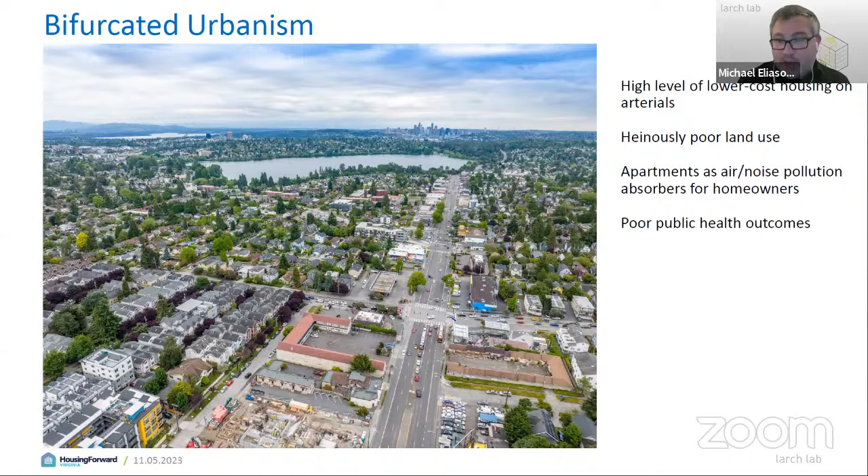Apologies, I muted myself. So today we're going to talk about unlocking family-friendly housing, livable housing, more climate-adaptive housing with point access blocks. In Seattle and the West Coast and much of the US, we have this really strange bifurcated urbanism where we focus a lot of density downtown, put density on arterials, and then immediately fall away to detached houses and townhouses. It's just kind of rare in the rest of the world. It's not a very effective way of dealing with housing costs and affordability. In the back of my mind, at Larch Lab, we're dealing with climate adaptation, decarbonized buildings, looking at how we do land use and how we design housing.

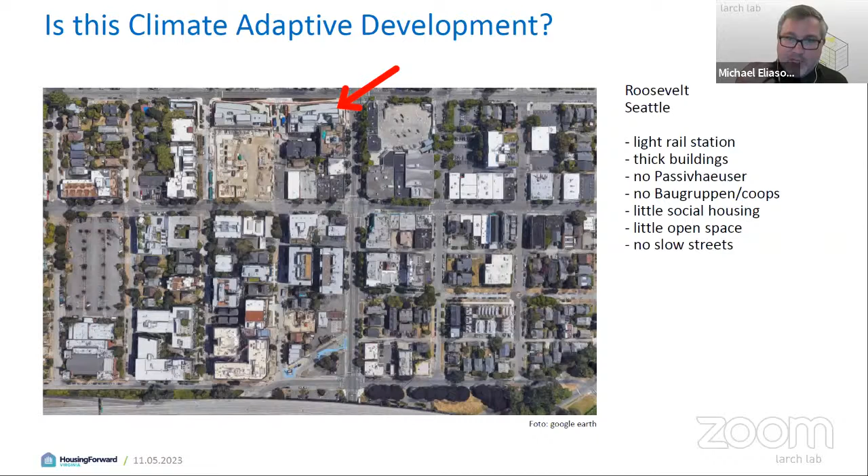This is a new light rail station in Seattle. It's surrounded by a couple of multifamily buildings, but then immediately drops away to detached houses. There are no cooperatives, there's very little social housing, there's not a lot of open space. So in thinking about how I worked on projects in eco-districts as an architect in Germany, and how we're doing things here, how we're planning here, it was kind of wildly different.

And I started to think about some of these development patterns that you find not just in traditional European architecture, but also in South America, in Asia, and in modern districts in Europe as well. There's more open space, this fine-grained development that goes on for blocks and blocks, more space for blue-green infrastructure. A lot of our historic districts have these really narrow lots with one-story, two-story commercial buildings that have existed for like 100 years.

But when they get redeveloped, developers will come in and pull together several parcels, do assemblage, and then build these huge, ginormous 5-over-1 buildings. This really isn't commonplace in the rest of the world. If we go back and look at something like Frederiksberg in Copenhagen, these are all really small buildings. How do they get this fineness? How is this possible if they're not doing two stairs per building?

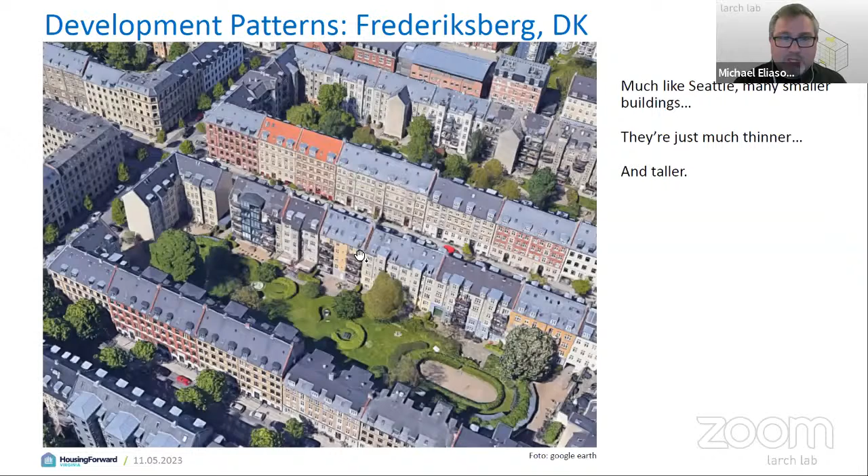So they're not just thinner buildings, they're also taller buildings. Like I said, the 5-over-1 is atypical in the rest of the world, but it's really the modern form of development here. Almost everything in Seattle now is headed in this direction, huge projects taking up a whole block. We'll play games, do modulation to try to make it look less bulky and massive than it is, but there's really no effective way to do that. Another way to think about this is that the way we're planning our buildings has effects on climate adaptation.

So can our buildings cross-ventilate? They have an effect on energy consumption. Do we have daylight on multiple sides? Can those buildings be utilized for more than just residences? Are there opportunities to bring in more uses, a mix of uses? The double-loaded corridor doesn't really have that flexibility ingrained into it.

So this is the standard form of development, corridor down the middle, 2 or more stairs, connecting all of the units. These end up being really small units. It's really difficult to get family-sized units in a building like this, especially in areas with high construction costs, high land costs, because you're looking at a 3-bedroom unit effectively taking up the space of 3 studio units or 4 studio units. And so the economies of scale aren't really working out. It's really development by Excel spreadsheet.

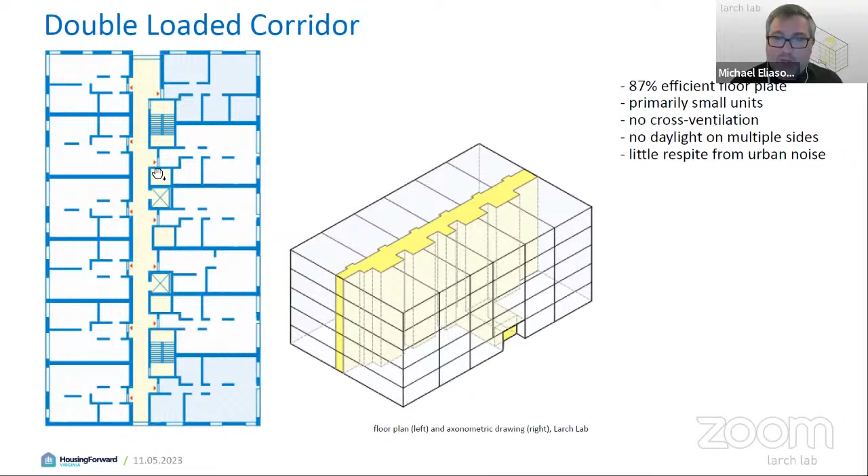Another option, it's really common in Switzerland and Germany, the single-loaded corridor. You just have your corridor on the outside or on the edge of the building. It could be interior, it could be exterior, but it does allow for cross ventilation. It does allow for a little bit more variability in how we're planning our units, our housing. The efficiency of these floor plates isn't as high as you would see with double-loaded corridors, and so they're not really utilized in a lot of development.

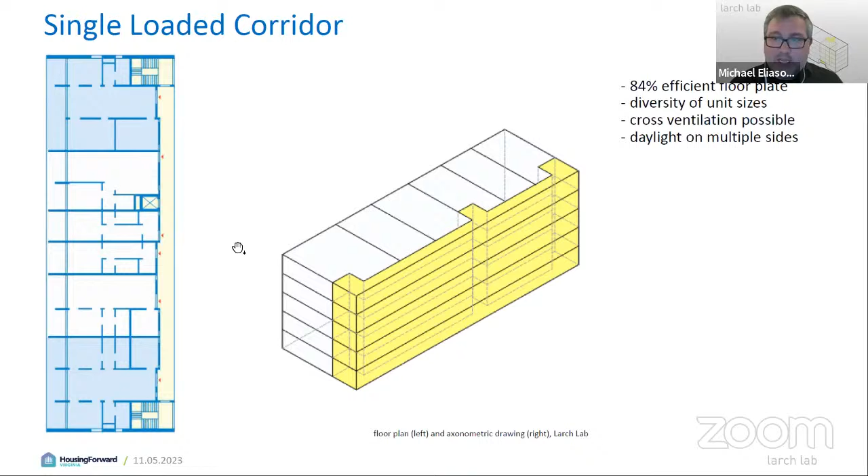But the point access block is really the single-stair building. It's the workhorse of urban buildings the world over, whether it's traditional, whether it's new, Tokyo, Hong Kong, Mexico City, Paris, Zurich. It is ubiquitous, except for in the United States. And there are a number of reasons for this. But this is a super efficient floor plan. I've seen plans that get up to 95, 96% efficient.

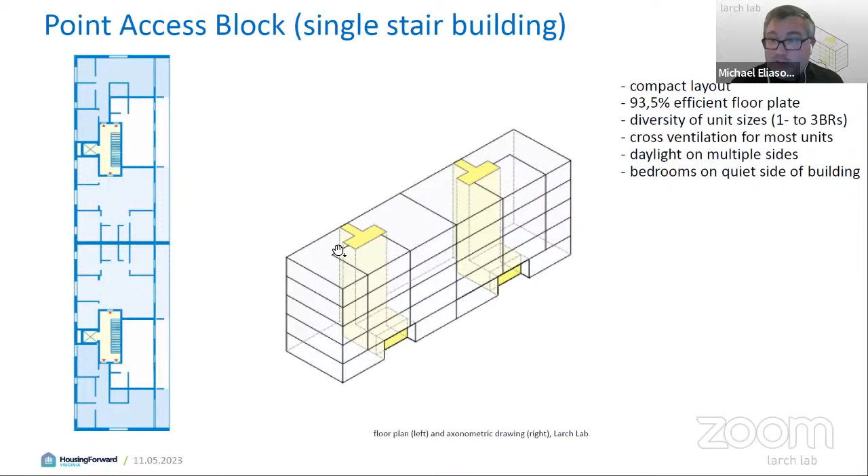It's compact, which is great for embodied carbon. It's great for reducing operational carbon and operational energy consumption. It allows for units that can cross-ventilate. It allows for daylight on multiple sides, or to put the bedrooms on the quiet side of the building. Now, Seattle has an interesting history with this. The International Building Code allows single-stair buildings up to 3 stories.

In 1977, our building code, which was at the time the UBC, the Uniform Building Code, effectively allowed unlimited height, maximum of 4 units per story. And then the stairway had to be either smoke-proof, so concrete, or exterior. In the 80s, that was reduced down to 6 floors. They brought in more conditions, but effectively today, this is still allowed. We can do 5- and 6-story single-stair buildings everywhere in the city. 4 units per floor. It's got to be sprinklered. We have requirements on travel distances, fire ratings, and things of that nature.

What's really interesting is that I just helped get a bill at the state level so that the rest of the state could adopt this through modifications at the state building code, not just the city of Seattle. Now, these are legal in Virginia, but only up to 3 stories. Again, here's our magic number, 4 dwelling units per floor. It has to be sprinklered. There are other conditions as well, travel distance. Just a typical project that you would see, maybe 2 or 4 units, generally around a stairway.

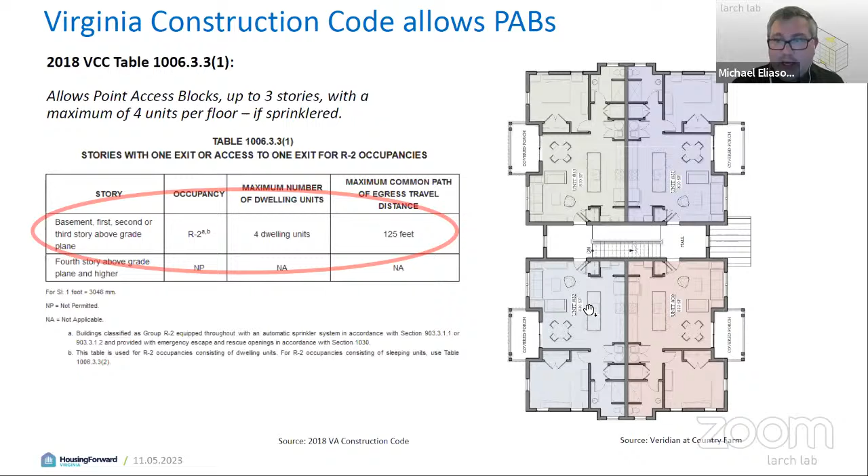When I went to school at Virginia Tech, this is the exact sort of housing that we lived in. There's a central stairway that was open, connecting all units on the 3 floors, and all of the units were 2-floor units, cross-ventilating, daylight on multiple sides, and fairly livable for being in a dense environment.

But there's this question in the back of my mind. Does fire burn differently in the US and Canada than it does in the rest of the world? Canada's one of the strictest when it comes to this issue. It's really an anomaly in the US as well, but almost everywhere else allows 5, 6, or even more stories.

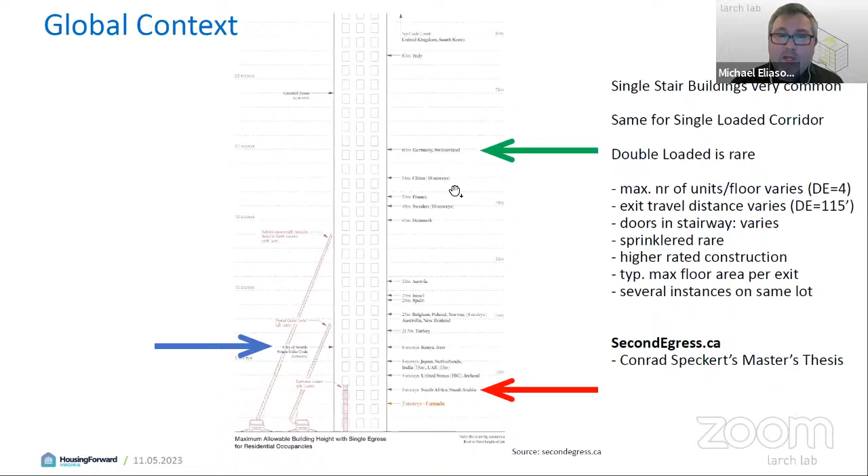And so there's this weird condition where we're requiring so much additional effort without getting, I think, a lot of gain in that. So we're sprinkling our buildings. We're doing fire-rated assemblies on our buildings. We're incorporating exit travel distances. These are all things that other countries will take like maybe 2 of, but they'll get better outcomes. So Switzerland, all of their buildings, concrete, most of them are single stair. You can go high rise, single stair, unsprinklered. Their fire death rate is significantly lower than ours.

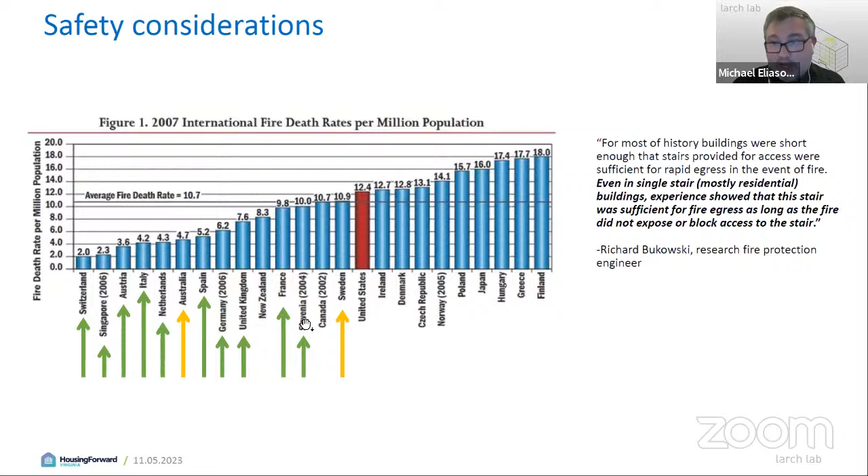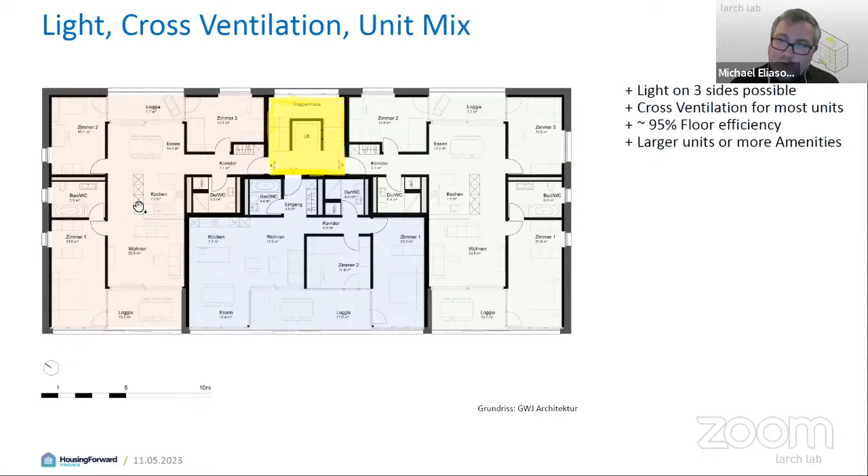So this is a project in Switzerland. Got a 2-bedroom unit here and then 3-bedroom units on the end. So there's more diversity on kind of the single level. And so what does this look like on a larger building? Well, typically they'll take single stair buildings and string them together. This is a really elegant Baugruppe in Berlin by a number of architects. And then this is Mies van der Rohe in Detroit. If I highlight the circulation spaces, you see that this is a lot more compact. There's more diversity in these buildings. There's a 1-bedroom here. There's a 3-bedroom here. There's a 4-bedroom here. Most of the bedrooms are positioned on the quieter side of the building.

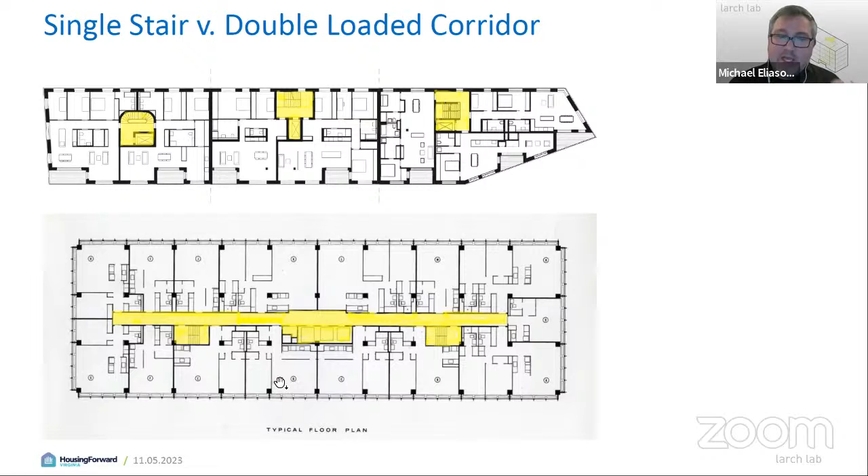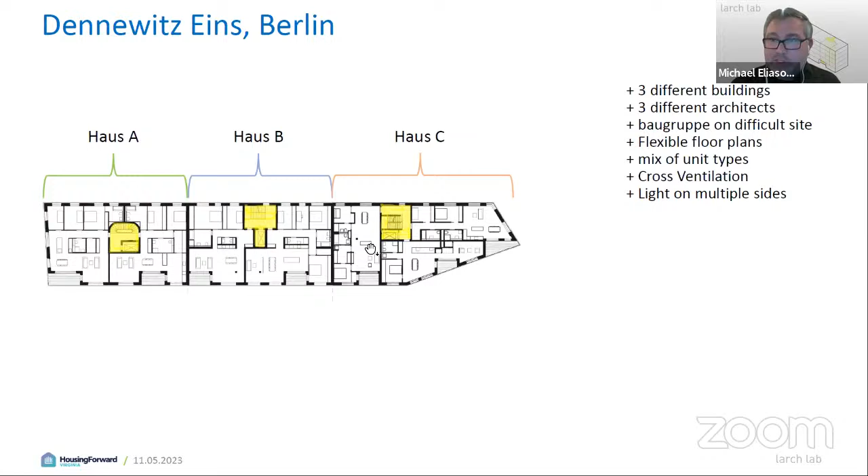If we go back to the Mies building, there's no opportunity for cross ventilation in any of these units. There's not a lot of variability. There aren't a lot of large units. And so it's this kind of social and economic mixing that isn't really happening in these buildings. And like I said, they'll take this building, they'll divide it up into kind of smaller buildings. Each one has its own core, each one has its own elevator. And this is pretty typical for most of Europe, whether that's new buildings or old buildings.

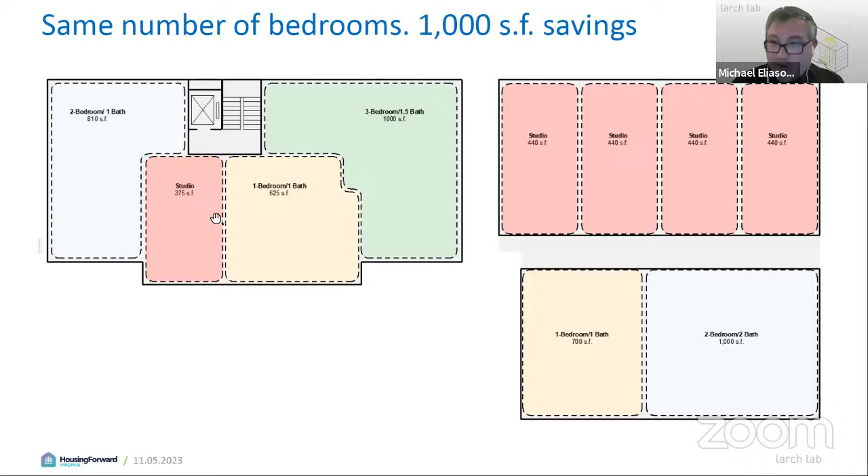And so what are some of the knock-on effects of this? Well, a big one is you could get the same number of bedrooms in significantly less space. So we looked at just kind of a typical section of a point access block and a double loaded corridor, trying to get the same number of bedrooms. And the point access block ends up being about 1,000 square feet lower. So there's less construction costs. There's less embodied carbon associated with that. There's less envelope costs, right? And so these savings start to knock on in really interesting ways.

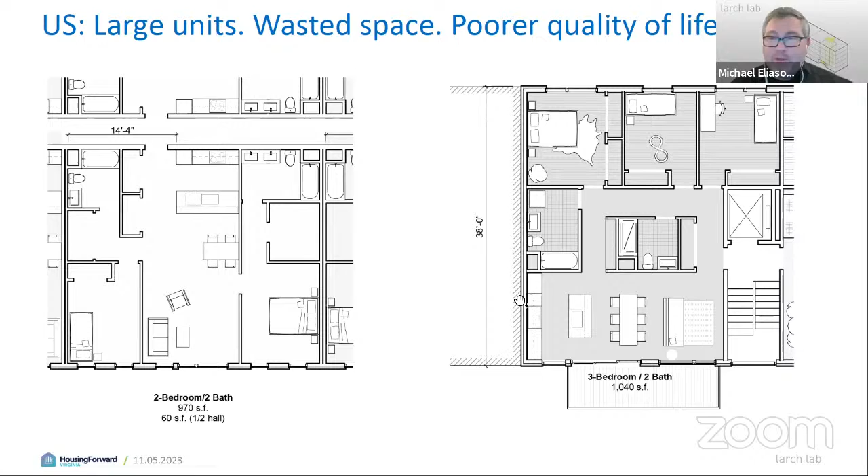This is a couple of floor plans for a study I did for a colleague of mine. 2-bedroom unit in the US. In Seattle, we have them up to 1,400 square feet, but generally about 1,000 square feet. And if you count the circulation space for that as well, the double loaded corridor, that's kind of about what you would get for a 3-bedroom unit. So we're building much larger units, and the quality of living in those units is radically different than what you would find in almost any other country.

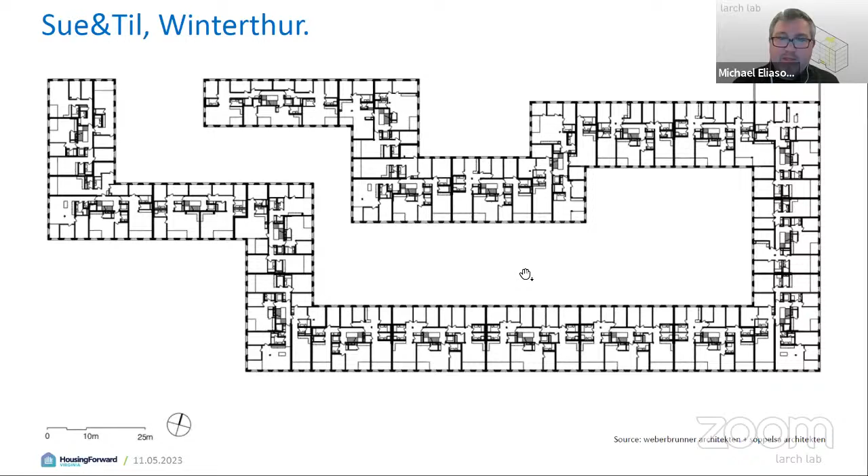And you can go really big on this. This is a really elegant project by Weber Brunner and Soppelsa in Winterthur, the Sue and Til, 4 to 6 story connected point access blocks, mass timber. I'm pretty sure it's not even sprinklered either. And if I highlight all of the stair cores there, right? These are 20 elevators and 20 stair cores, each with a handful of units operating out of it. So if this were the US, this building would be significantly thicker. It's only about 38, 40 feet deep for this building.

In Seattle, our floor plates are approaching 80, 90 feet. So your courtyards would be smaller. You wouldn't have units that can cross ventilate. You wouldn't have the diversity of unit sizes that you see here. And so it's a radically different way of living, I think. Instead of having one corridor connecting this entire building with lots of small units and hundreds of people that you don't really ever see in a day, you have a couple of people on your floor.

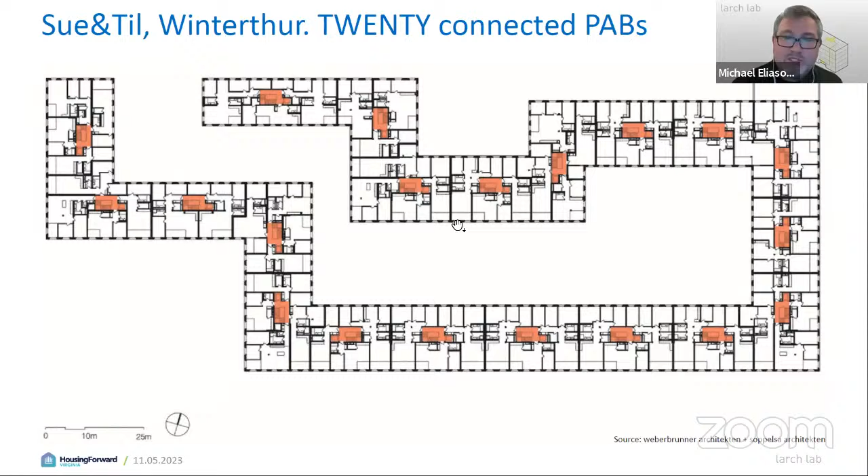You can run across the street or run across the corridor and say hi to your colleagues or borrow tea or sugar. And it's a much more compact way of living.

The City of Vancouver is really kind of the initiator for why Larch Lab started. They asked me to talk about this for some of their projects and to help facilitate discussions on allowing taller point access blocks in Vancouver and BC. At the time, they were only limited to 2 stories, and now there's a process to get a code mod to allow it to 6.

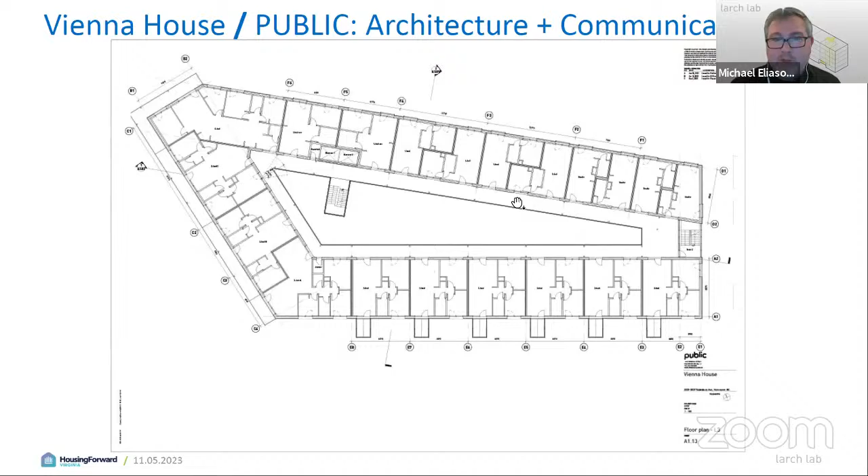Taking a mass timber passive house social housing project, it's a corridor wrapped around a courtyard, so all of these units can cross ventilate. Basically took that concept and said, look, if this were this European-inspired, German-inspired point access block building, connected point access blocks, what would that look like? What are the differences? Same number of units, similar sized units. Most of the units can cross ventilate.

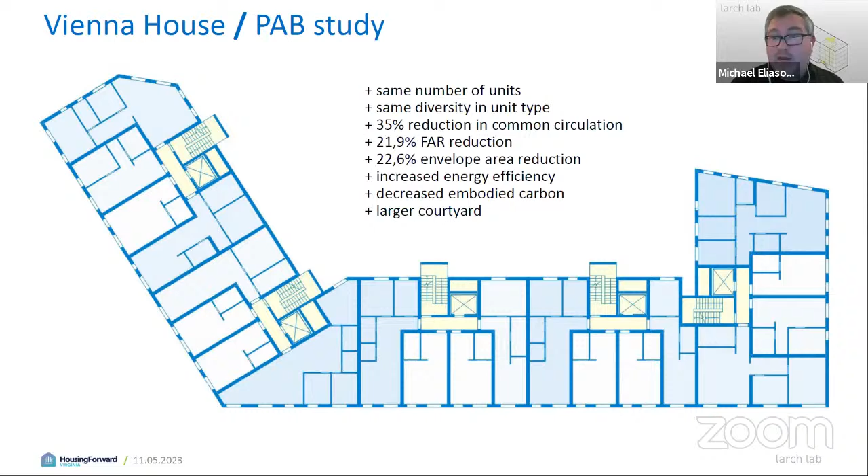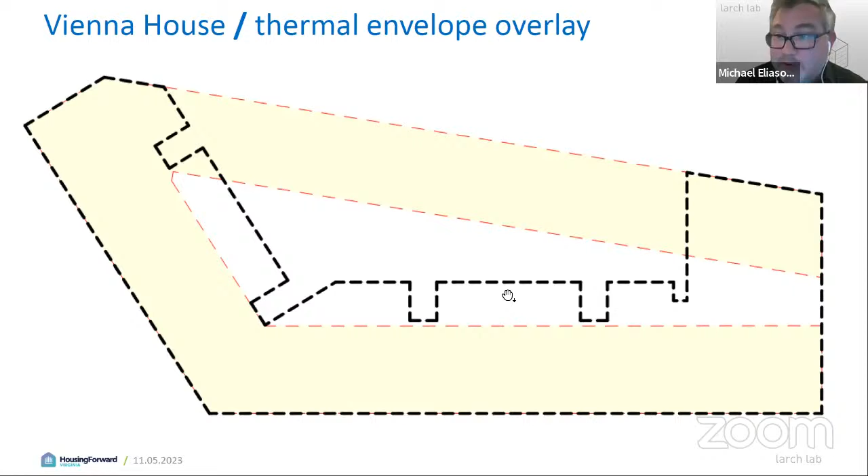But what was really interesting to me is that you get significantly less circulation space. You have significantly less FAR utilized. So our building costs are going down significantly. There's less envelope area. So our buildings are not only cheaper, they're also more compact. Energy efficiency is associated with that. Our embodied carbon goes down significantly. And if we start to look at the thermal envelope overlays of this building, the opportunities for open space on lots become even larger.

Taking this concept and looking at a project in Hamburg and a project in Seattle, very similar size buildings, very similar number of units. This one is more family-sized units and fewer bathrooms and kitchens. The US-based building, it's almost all studios. Each studio has its own bathroom, it has its own kitchen. So it's a significantly more expensive building. Oh, and by the way, the floor plate is also significantly larger.

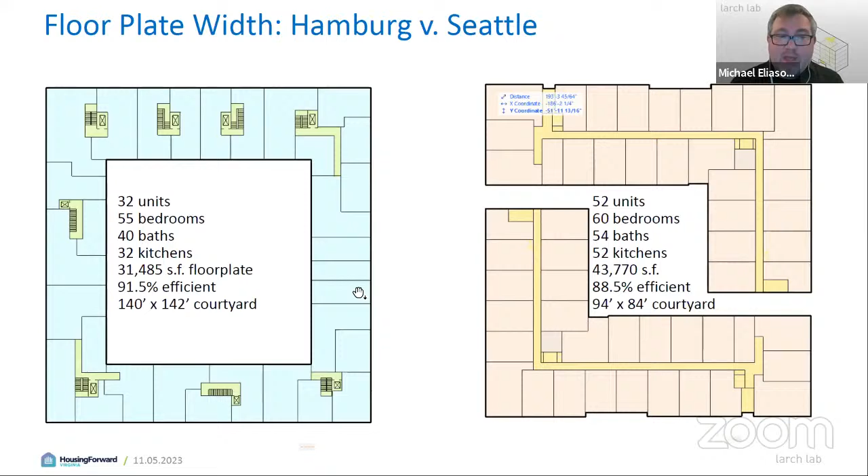When we overlay those two floor plates and look at the differences and the costs associated with that, there's about a $4.6 million difference between the German building and the Seattle building. And if we multiply that over 6 floors, that's $28 million. That's not an insignificant amount of money. Now, granted, this isn't allowed in the US right now, hoping that we can change that. But this is something that I think we should be focusing on.

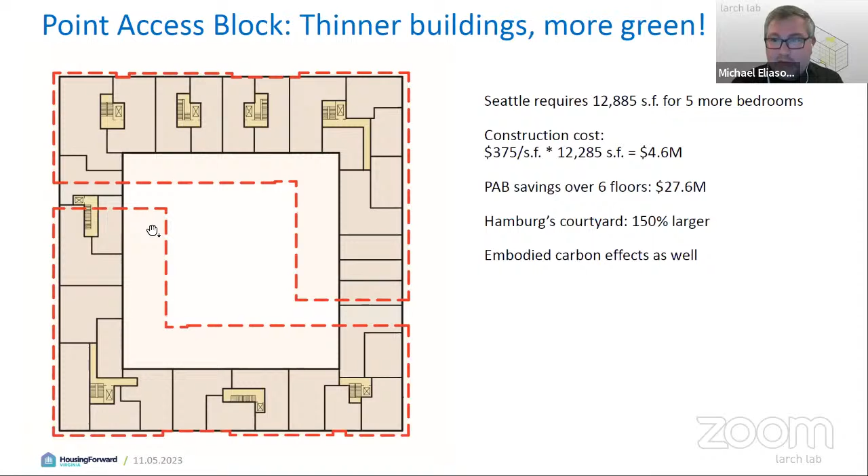This is really the next step beyond talking about missing middle housing. This is kind of that next level, that mid-rise, that missing mid-rise that is ubiquitous the world over, outside of New York and a couple of other places in the US. Just a couple of examples.

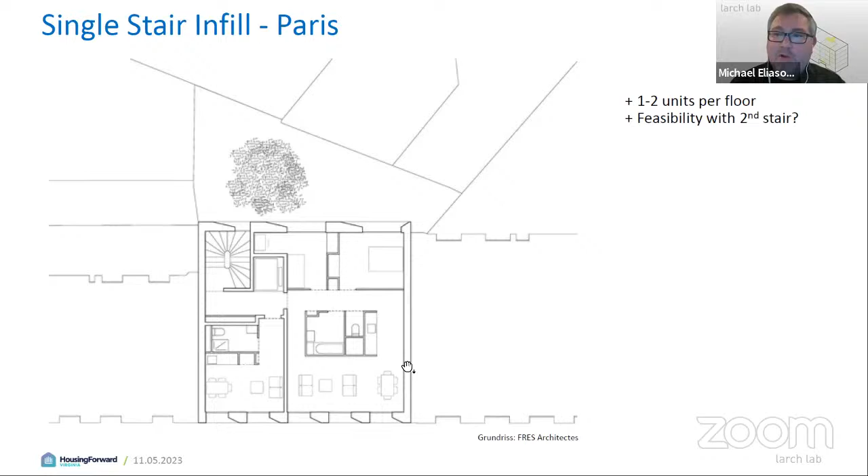And this, for me, is one of the key things that I think is really interesting about point access blocks, is that it allows these smaller lots to really be utilized in ways that they couldn't be under our current code.

This is another really elegant project. This is the Capitol Hill Urban Co-Housing by Schemata here in Seattle. Mixed-use building, ground floor is Schemata's architecture studio, and then co-housing above, centered around this open courtyard. Family-sized units, 2 bedrooms with studios. It's got 1 stair. It's very open, and so you're constantly running into your neighbors. It's a radically different way of living than you would find in most development here in the US today.

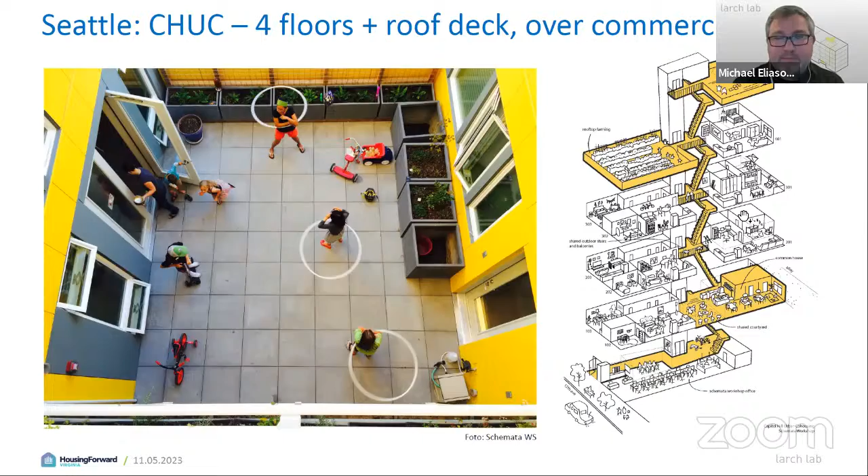Another project in Seattle that I find really intriguing, this is a 6-story wood frame project for Habitat for Humanity. Units from studios all the way up to 3-bedroom units on a 4,000 square foot lot. Now, the urbanism of this drives me nuts. I think this is a really horrific way to plan cities, but this does allow us to bring more family-sized units, more affordable units in places that those kinds of homes don't exist.

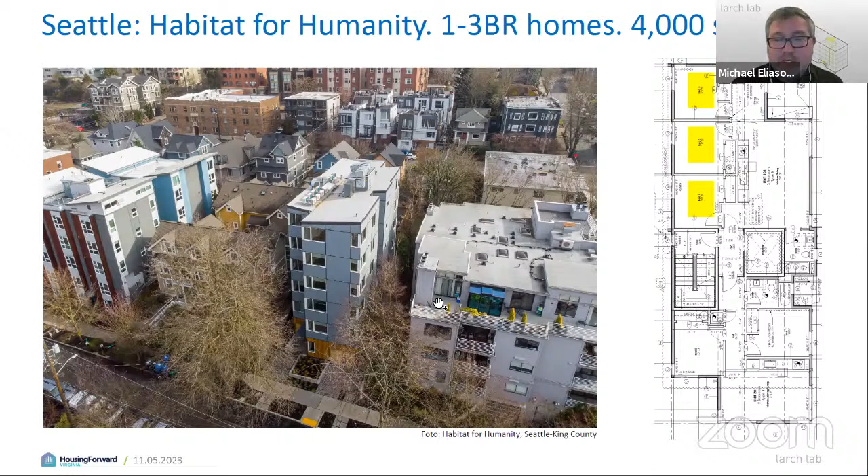In our own work here at Larch Lab, we're looking at utilizing connected point access blocks in Seattle. We're limited to 2 conditions of that on a wide parcel. It's not very deep, utilizing a combination of maisonette units, so 2-floor units, and flats to get all 2- and 3-bedroom units. So if we look at how this would traditionally be done, it would all be studios, maybe something a little bit larger at the corners, no cross ventilation.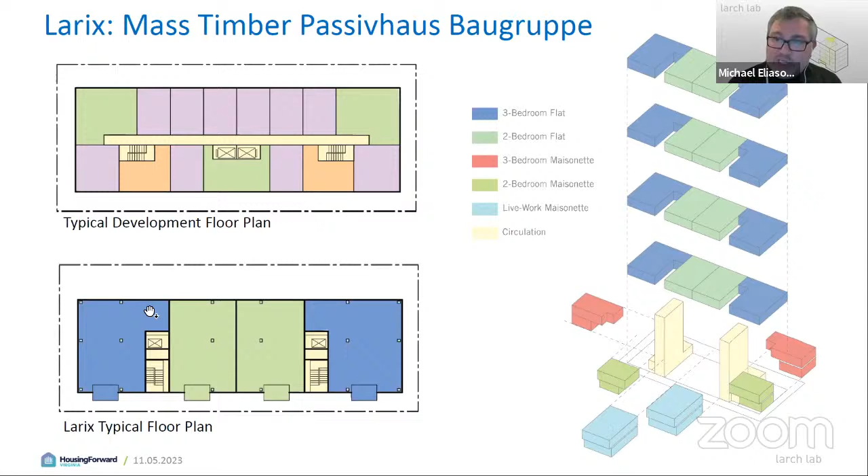And so we're looking at doing 2- and 3-bedroom units. They're all flats above the 2nd floor, having an adequate number of bathrooms. All of these units can cross ventilate. Here's our stair core. Here's our stair core. The bedrooms can all be positioned on the quieter side of the street, on the courtyard. We're not looking directly into another building 10 to 14 feet away, which is kind of what tends to happen with a lot of these buildings in Seattle.

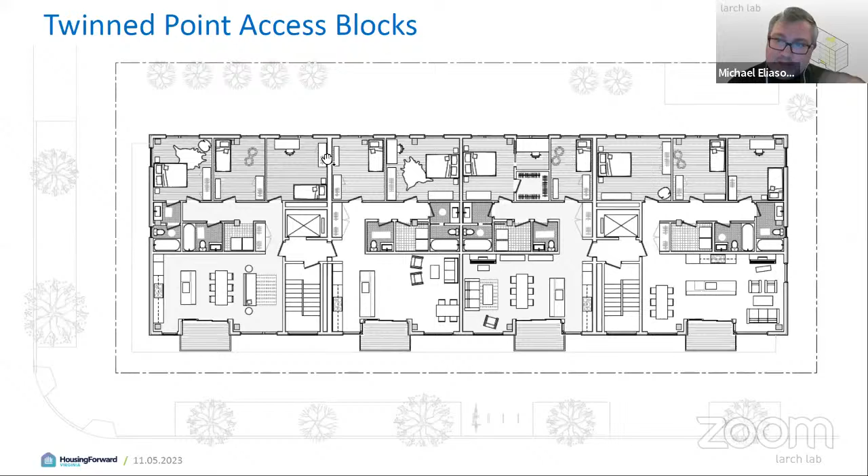And so there are really different ways of how we start to inhabit our buildings. And of course, we're trying to do mass timber and passive house and kind of incorporate a lot of these things that are kind of at our ethos into this building as well. But when we start to scale out, what does this development look like at a larger scale? The status quo, there's not a lot of opportunities for open space. There's not a lot of diversity.

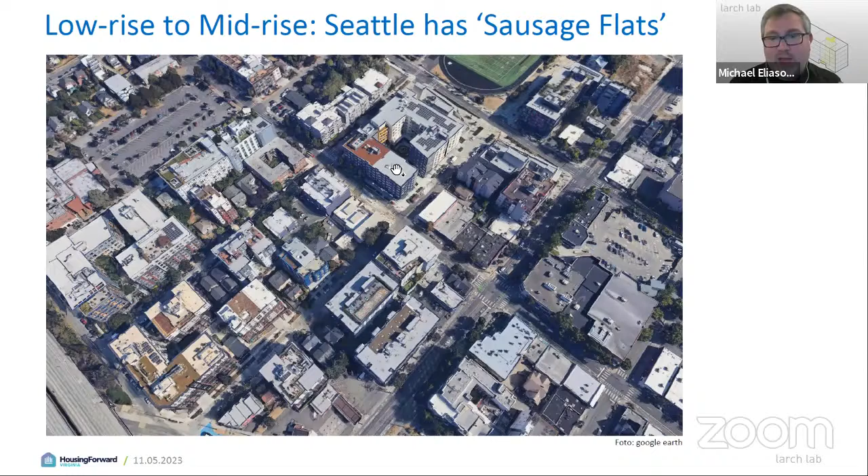This entire block was remodeled, and they'll paint different colors and use slightly different materials and try to pretend that it's not the same building, but it is. And the floor plates are significantly thicker, and there's a density associated with these that I think is actually kind of antithetical to more livability, to having kind of more climate adaptive and quiet urban environments. But it doesn't have to be that way.

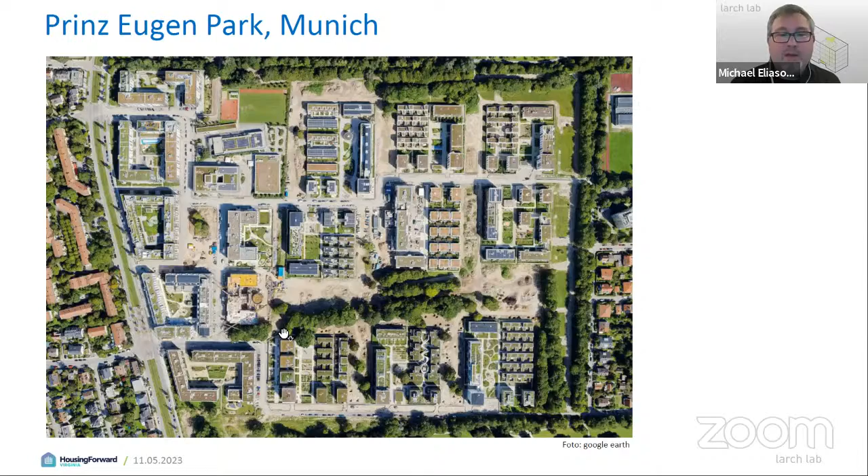Like I said, even at the building scale, there's this weird thing going on where we don't have a lot of opportunities for green. We don't have a lot of opportunities in inducing, I think, more livable places. Everything is still auto-centric. It's really difficult to get away from that. But you can still have cars. You can still have the same kinds of mobility options as we do in the States and other countries, but do it in ways that are maybe more humane and safer for your kids to run around and cross the street and things of that nature.

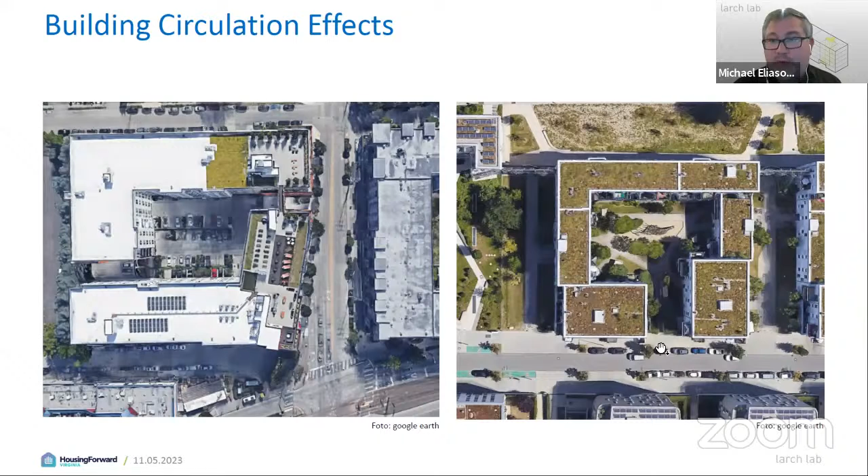So in the back of my mind, there's this overarching question. How are our codes affecting quality of life? You know, the double-loaded corridor, for me, The Shining is like the perfect embodiment of what it's like. And if you have young kids, if you have dementia, there are additional hurdles associated with that as well. But what if our stairways were communicative? What if they were open?

And we can try to integrate them, but, you know, success isn't very high in those projects. And we're not getting a good mixing from the social and economic aspect. There's not a lot of family-friendly homes in this. So for me, this is ideal where we can start to get to the way that we should be developing and the things that we should be seeing if we start to rethink the way that we're doing our building codes. And so that's why I've been talking about this on and off for the last 18 months.

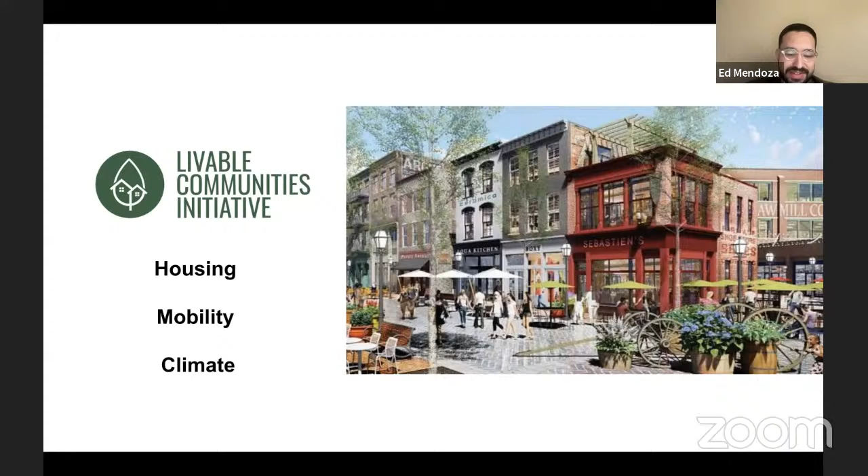Our group is composed of various experts in the field of housing and transportation, professors, senior planners, as well as community leaders and organizers. And lately, our group has been achieving significant success in forming alliances with different stakeholders and mobilizing individuals who previously had mixed feelings about housing policy or didn't really want to venture too much into them, but now have become much more involved in the area. We try to meet people where they are and address concerns when they are made in good faith.

So after meeting with a whole lot of stakeholders, homeowner groups, renters, policymakers, we've come to center our focus on addressing some key issues in contemporary building policy. These first three cover building intensity, aesthetics, and affordability. So in terms of building intensity, we look at how new large developments may impact established neighborhoods and replace the granularity of smaller neighborhood-serving sites with significantly larger developments.

Aesthetics usually come up as a concern, as many people are annoyed with what some refer to as developer modern in new developments, and also the presence of parking podiums that may disrupt street life and disrupt the eyes-on-the-street concept of Jane Jacobs. And affordability and the target market for new housing is also a significant point of debate.

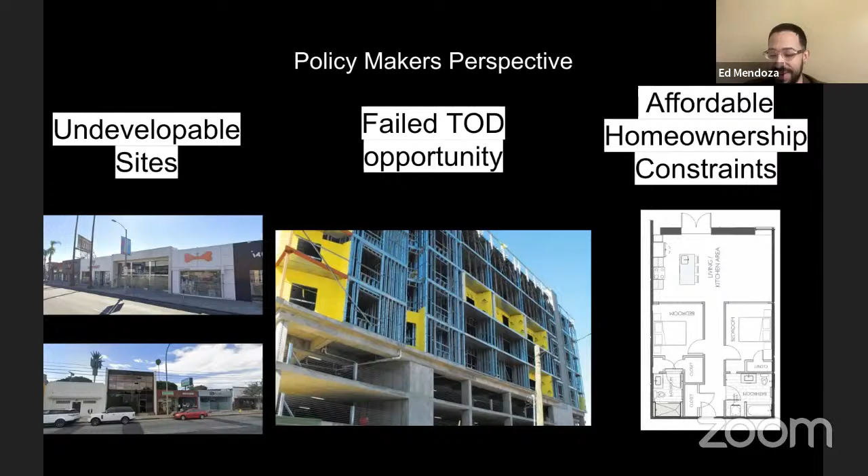When speaking to policymakers, these three issues usually are the ones that come up. First is our sites that cannot be developed because they may be too small, or the housing market may not support profitable development on these sites. The second is the issue with overparked buildings in TOD, transit-oriented development areas, and developers not wanting to go that extra step in truly creating transit-oriented development. And lastly, the prevalence of windowless bedrooms and somewhat lack of unit layout variation in new development.

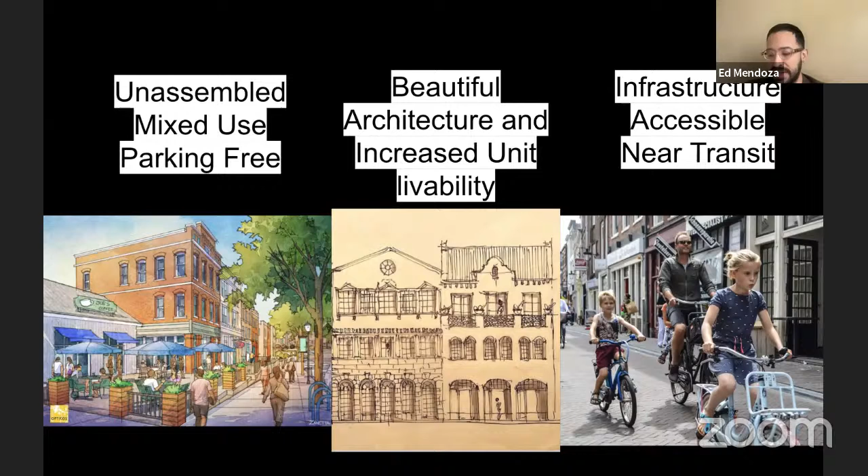So our plan has come up to address some of these topics and concerns by looking into ways to promote and encourage new methods of construction, utilizing best practices, both nationally and internationally. We advocate for policies that incentivize granular parcel-by-parcel development. We look into ways that promote architecturally rich housing. We advocate to develop housing that is parking-free or parking-light as mechanisms to lower rent and increase transit use. And finally, we try to tie everything together with mobility infrastructure improvements to facilitate this process.

So that was a little bit of an overview of the LCI and who we are. And now I'm going to talk about why I'm here today and how we found that single-stair reform will be instrumental in changing how we build, not only in Southern California, but potentially the United States.

So a big challenge in Los Angeles, and I'm guessing a lot of metro areas, is finding how we could leverage more builders and more players in the market, and how we could unlock more places to build. In LA, land tends to be incredibly expensive, and typically if you want to develop, you also have to assemble land as well. Assembling land in LA, believe it or not, is also incredibly expensive.

Land assembly premiums normally reach up to 40%, which creates a barrier to housing construction. Currently, the bulk of infill multifamily developers in LA tend to be well capitalized, so they can afford the costs of land assembly or any cost inefficiency that contemporary building brings. So issues regarding land assembly may not be on the forefront or an immediate pressing problem for them.

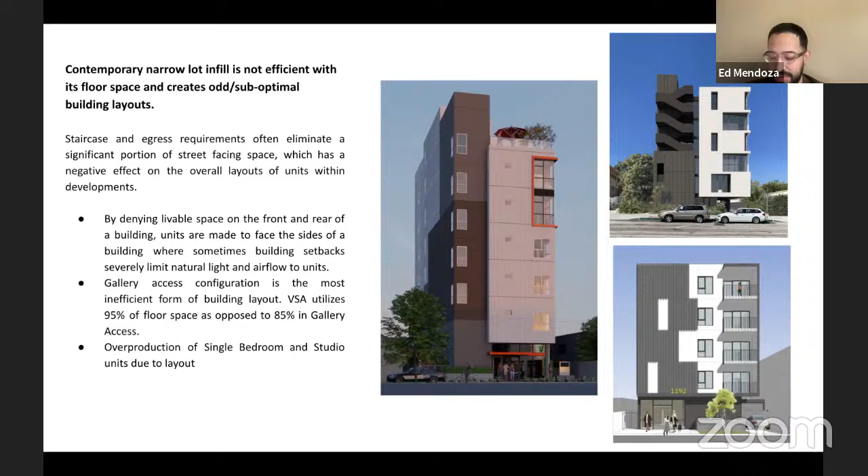However, the same cannot be said for smaller developers or contractors attempting to move up the value chain. These are people who build ADUs up to fourplexes. They could be homeowners, small commercial property owners, community land trusts, or mission-driven affordable housing developers, where land assembly poses a significant barrier. There are ways to build housing on some of our larger parcels in the city, but the trade-offs are significant and definitely impact the livability and frequency of new development on such sites.

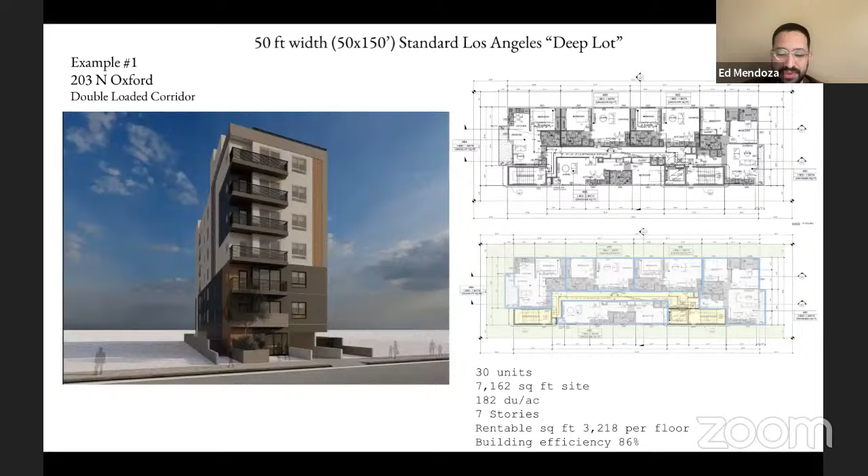Here are some examples of single parcel construction in LA. You'll see a common theme in all of these layouts: there's a corridor spine that runs through all the units. Units tend to be small, lack variety, have windowless bedroom layouts, and have access to only one side of light.

Lack of cross ventilation creates an over-dependence on air conditioners versus passive cooling, which drives up costs. Staircases also eat up space on the front of the building, forcing units to look to the side of the building. Having staircases up front also makes it very difficult to fit commercial space on the ground floor, severely limiting the possibility to create resilient mixed-use development.

Unit proximity to adjacent properties is also very tight. So if you live on the second floor in one of these buildings and an adjacent building goes up, you're out of luck with getting sunlight. You kind of see it in this building already.

This has both profound political and fiscal impacts. Developers may refuse to build on lots other than corner lots facing the street because they fear that if building on a mid-block site, their units will devalue once an adjacent building goes up, blocking views and light. Residents may also justifiably fight new adjacent housing if it means their source of light and air will be taken away.

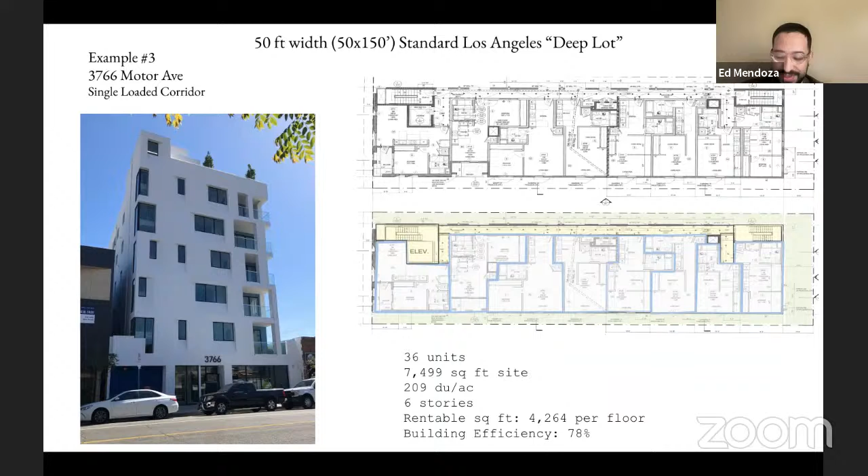So this is a little bit of a summary of what I just mentioned.

So should we give up on single lot development given the drawbacks that I just stated? Should we try to focus only on larger style development patterns? Would it even be possible to make something livable on smaller pieces of land?

While we recognize that single-stair reform is not a silver bullet or a panacea in housing, it sure helps a whole lot in how a building can be developed, and completely challenges long-held standards and beliefs in our built form and environment. With a single-stair layout, units are no longer forced to face the side of a building, therefore a side yard is no longer technically necessary.

And if one were to eliminate a side yard requirement, the options of building layouts increase dramatically. For example, the area typically used for the first and second staircases, located at the front and rear of the buildings, in addition to the side yard setbacks, could be repurposed to allow additional units that face the street. All the space dedicated to a narrow side yard slot along the periphery of a building can be consolidated onto usable central courtyards to provide green open space.

And all of this whilst not giving up on square footage or floor usage efficiency. All or the majority of units could be capable of providing multiple angles of sunlight and air circulation. And the distance between opposing unit windows looking at each other also increases significantly from the status quo of maybe 6 feet to up to 25 feet now with single stair reform.

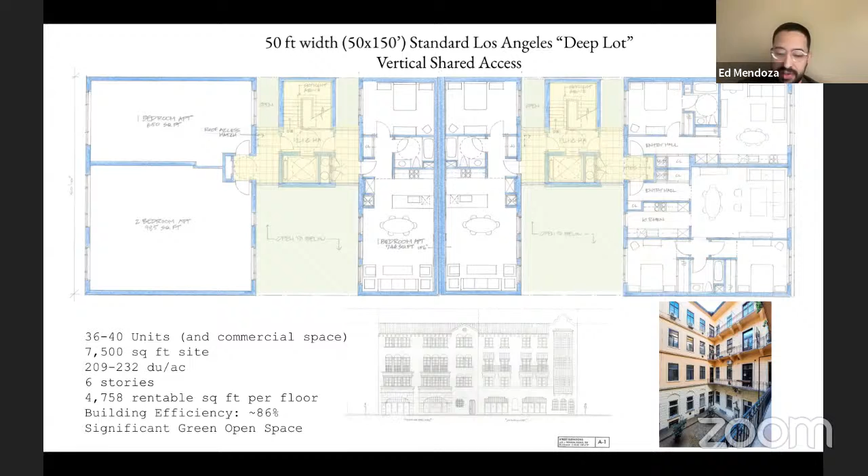In this drawing, we have a layout that has roughly the same density as the buildings being built today in Los Angeles. However, it comes with a bonus: it also holds a significant increase in rentable square footage, area per floor, as well as higher building efficiencies. So you get more bang for your buck as a developer.

Another issue we have in Los Angeles is on sites where land is very expensive and existing businesses are also very successful. If land assembly is impossible or very difficult for a developer, we usually won't get any housing built. If a landowner decides they want to build, today it's incredibly difficult to facilitate construction due to rules that favor land assembly and your typical 5-over-1 development. However, single-stair opens the ability to modify buildable density and design standards to facilitate construction of relatively dense buildings. This floor plate still maintains an acceptable density of 170 dwelling units an acre, while maintaining light and air attributes from the drawing of the larger site in the previous slide.

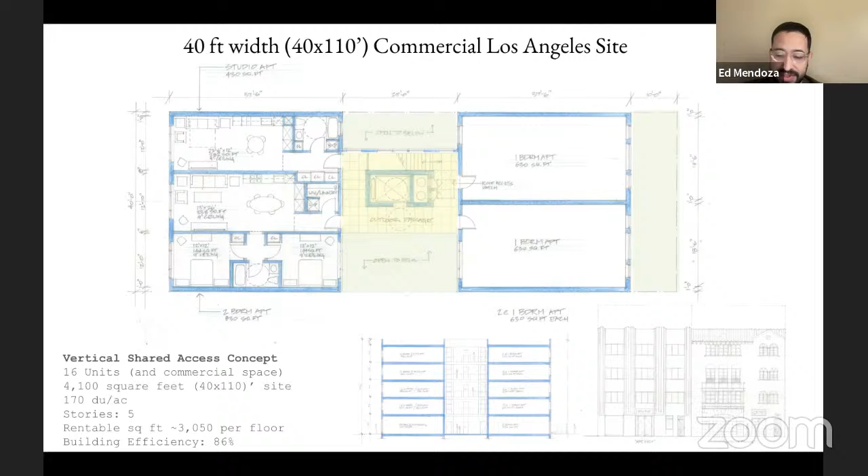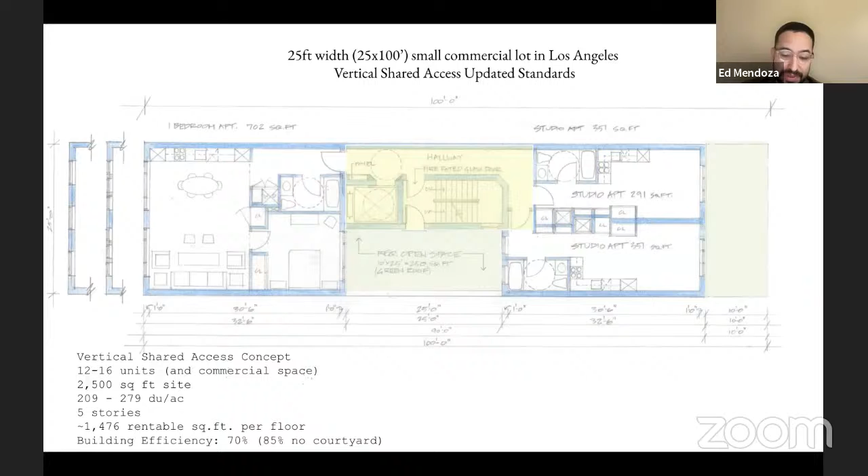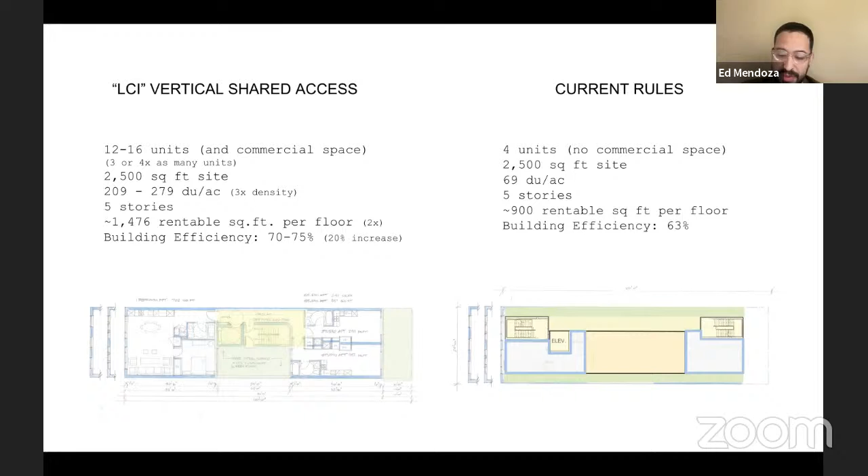This is a very small site, only 2,500 square feet. Today it would be impossible to build on it, besides maybe one or two large floor plate units or some type of SRO or co-living configuration. Single-stair reform, along with strategic changes in planning and design standards, would allow us to build 16 units on such a constrained site. Side by side, the right being the single-loaded layout, the single-stair layout facilitates 3 to 4 times the density and almost twice the rentable square footage on such a limited site.

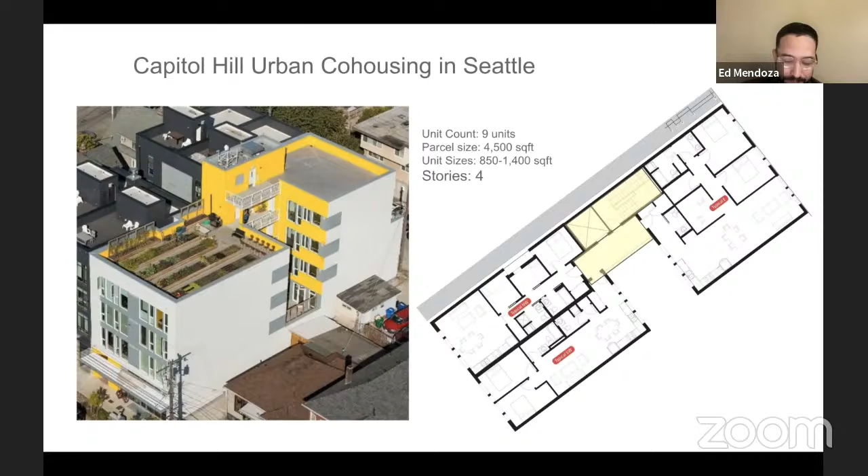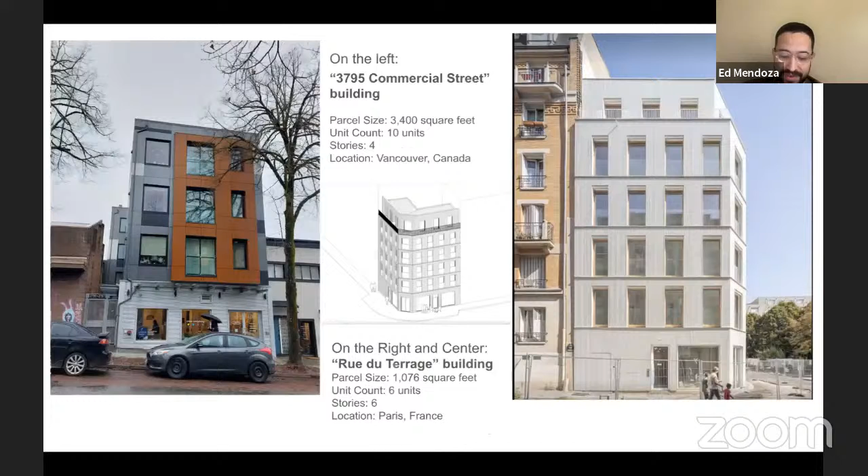And it's funny, I'm talking like we're inventing something new, but as Michael demonstrated in his presentation, there are plenty of examples of building layouts like this here in the US and abroad that have applied the advantages of a single-stair layout. This one's in Seattle, and this one's Vancouver to the left and Paris social housing to the right. The one on the right has 6 spacious units on only 1,076 square feet. Amazing, right? These are some more examples.

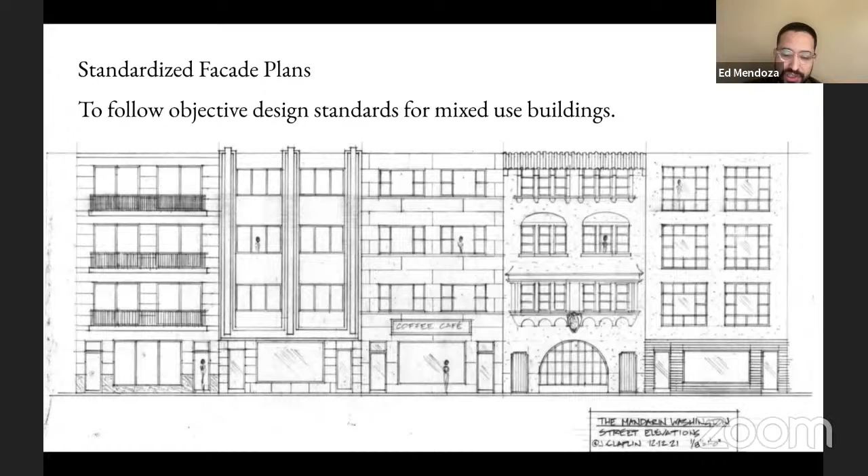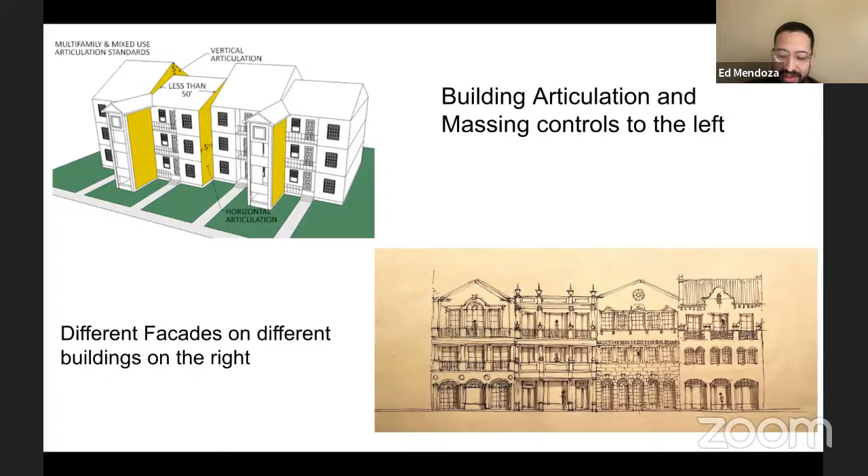All right, so on to building aesthetics. Because single-stair projects specialize in granular development, standardized facades that utilize one particular style begin to make a lot more sense. Today, many planning departments utilize tricks to break the massing of a building. A developer may be required to apply 3 or 4 different cladding materials to their facades to articulate and simulate multiple buildings. This practice becomes redundant in single-stair buildings, as you get the real deal.

Historically, many major cities in the world have built this way, with Paris and Vienna being major historical examples. This is also great for getting neighbors on board with housing. One concern we always hear is the ugly, bland nature of new construction. Plenty of people hate parking podiums and the fake articulation that's forced upon new buildings.

And I know I'll get the ire of architects for this, but looking forward, creating catalogs of pre-approved facades in local jurisdictions really activates neighbors and allows them a higher level of participation, supporting designs from our best architects, and that in turn facilitates support for housing overall. Europe has a history with building competitions that allow for some beautiful looking buildings, and I believe we could definitely reach something very similar to what they have.

And one last thing, it also lessens the effect of visual blight that hyper value-engineered buildings may bring over time—again to the ire of some developers this time—but this is something I'm going to talk about in the next slide.

So one last topic worth bringing up is a side effect of existing second means of egress stairway requirements, and what some developers do to avoid them altogether. As you might know, there are building codes for different types of buildings and occupancy uses. For those who don't know, a 1 or 2 unit building has a building code separate from larger multifamily construction. This 1 or 2 unit code is typically reserved for single family homes, townhomes, duplexes, and has a more relaxed take on single means of egress and requirements for a single staircase.

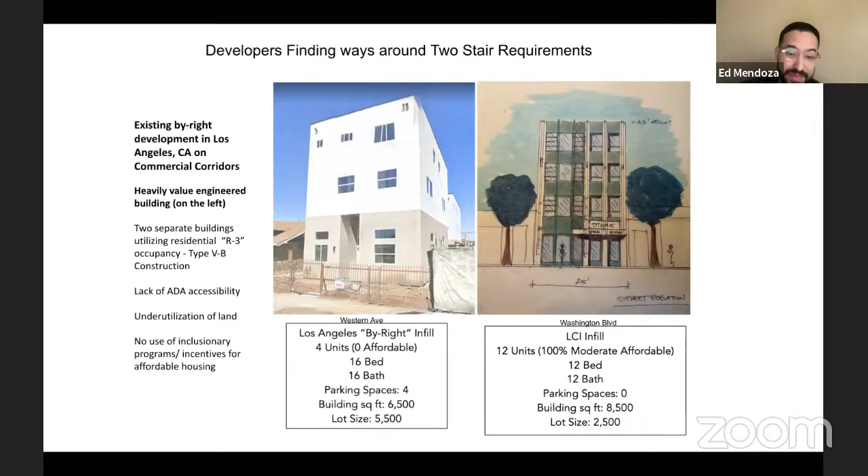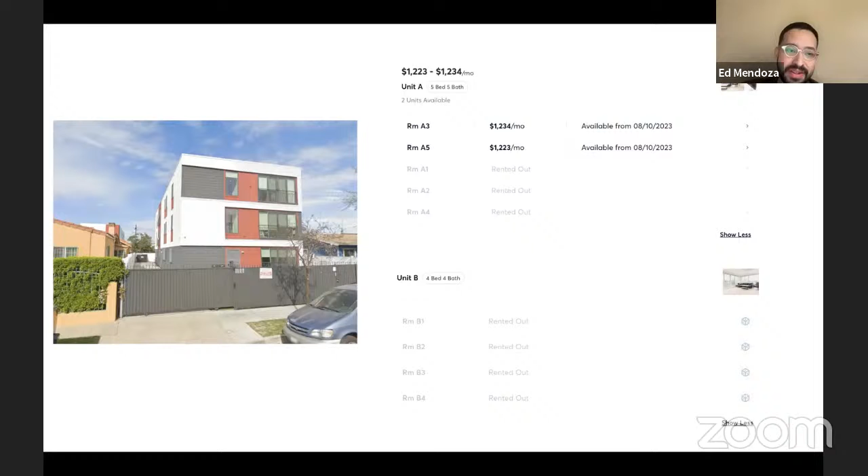Here are some examples of how they are leased out. Again, it's 4 units, but they're leased out by the bedroom at $1,200. And here's a floor plan of them.

Again, the unit is just bedrooms, and I'm not saying they're bad - they do fulfill a role in our housing market in Los Angeles.

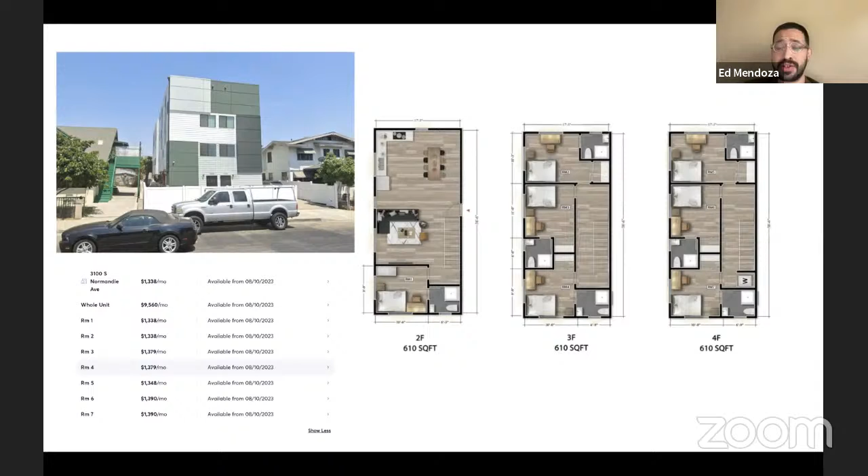But I wouldn't consider it the best that we could do, or outright morally ethical, that we essentially relegate our working class people to buildings that do not have the same levels of ADA accessibility and fire protection as your standard multifamily construction.

But they're very popular - you'll see them all throughout Los Angeles, and they've got the ire of a lot of politicians who are trying to find ways to make them illegal. Our take is: hold up a second, don't make them illegal. Let's find a good working alternative to this type of construction, and get more housing built.

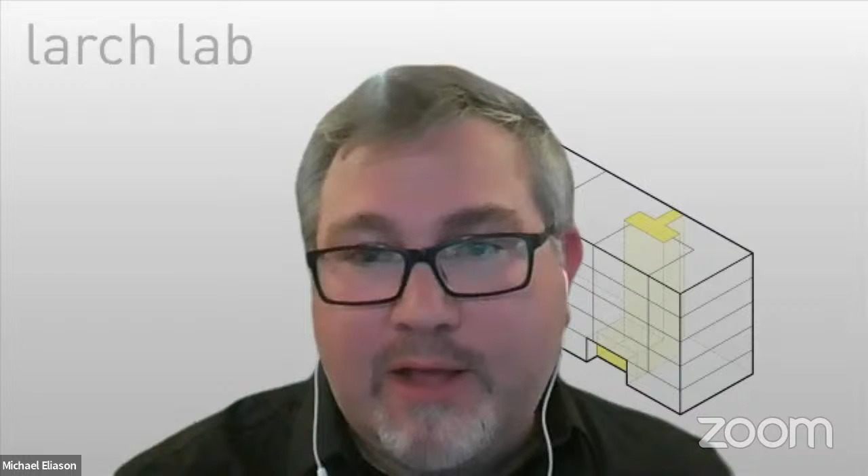And I think that having a 4-story 8-plex with 1 unit on either side, family-sized units, it's totally feasible. It's totally legal. And now that our zoning at the state level has started to change, I think that we'll start to see more projects like that. I'm hoping, anyway.

Yeah, and if I could add a little bit, coming from the planner, public angle, sometimes planners try to be prescriptive and say, hey, developers, you've got to build these family-oriented units, right? But then that immediately clashes with the building code and the built form of developments, and so you get developers that say, well, if you're going to require a certain amount of 2 beds or 3 beds, we're just not going to build the project. It just doesn't make sense. Gotcha.

So let's jump a little bit to, I know that you guys may not know specifically this, but since this is a Virginia oriented group, we probably have a large audience based in Virginia. There were a couple questions asking about the status of these conversations in Virginia, and also an audience member from Wytheville, Virginia, talking about their codes: are there resources for model ordinances or codes for communities? So I don't know if you all have any interaction with advocacy in Virginia, and if you provided any codes for planning departments here at all.

I can take the first part. I saw that Lyle Solla-Yates was on the attendees list earlier. Lyle was instrumental in advancing a code modification to allow this in Virginia. I think it was last year, and it didn't get through to the next level. It also didn't get entirely shot down. It sounded like the Code Council was interested in talking about it further. I haven't really been in contact with Lyle or anyone else who's working on that, but I know that there are groups working towards it.

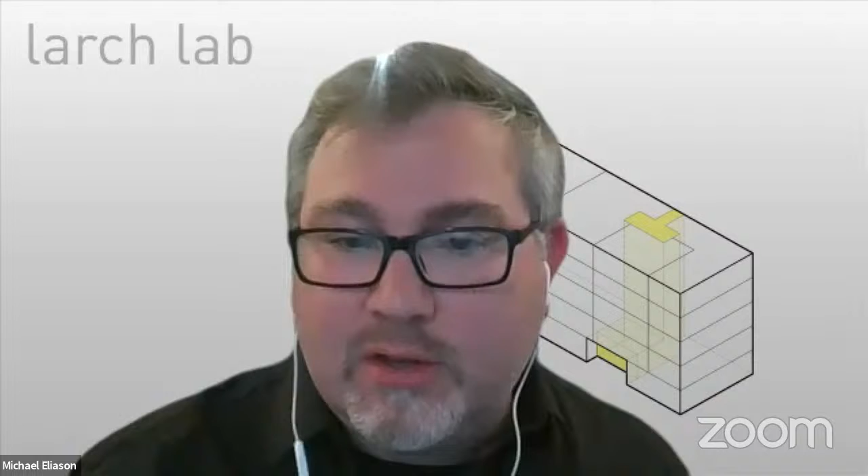And so, like Ed said, this isn't a silver bullet, but it does start to open up some really interesting possibilities. I don't know if Lyle could maybe drop some information in the chat, or if there are other groups; it seems like something AIA Virginia or some development groups could also take point on as well. But that's all I know on that issue.

And when it comes to model codes, my org has written a couple for cities in Southern California. There might be a couple differences between Southern California and Virginia, but the means usually lead to the same end. Another important thing to note is that these model codes will be significantly different than existing planning design standards, because today planners design for the double loaded corridor and the single loaded corridor, and they try to maximize the value out of these setups. They try to squeeze everything they can get out of them.

But this different code completely changes the paradigm. It completely changes the amount of open space that could be allowed, the amount of cross ventilation or designs that could be facilitated. And so it opens up a very interesting conversation about how we look into the future of multifamily construction in the US. Gotcha.

So there's a question which I'm not quite sure about. There's one that says Virginia Tech Hokies or University of Washington Huskies. I don't know if that's a reference to the Virginia-Seattle dichotomy here, but they actually wanted to know how Virginia compares to Washington in building innovation and infill practices. And then they're also asking about zoning codes and permitting processes, and how easy or difficult it is, if you have any experience or have talked to your colleagues on the East Coast side about those things.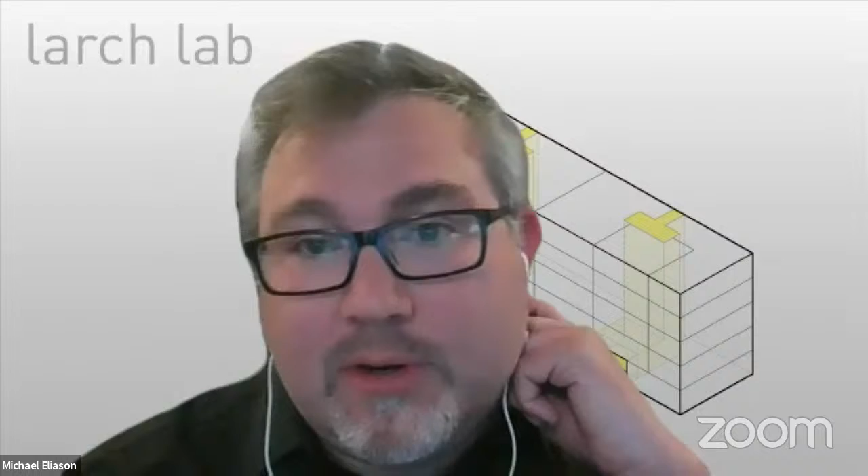But also, when it comes to mass timber, the Pacific Northwest, specifically the abundance of wood and the value-added wood industry here, has definitely driven part of that. We're not building as many mass timber projects as I thought we would, but there are some really interesting projects. There's an affordable housing project that's under construction. There's a couple of taller buildings under construction. I love mid-rise buildings, and there's some really interesting stuff happening in that space that is starting to permeate through other aspects as well. And Susan Jones, an architect here in Seattle at Atelier Jones, was one of the facilitators for getting the mass timber code adoption passed through the Code Council. So those are two of the bigger things.

When it comes to zoning and permitting, everyone looks at us as being fairly progressive. We build a lot of housing compared to other cities, but honestly, boots on the ground, the cost of development here is heinously high. It's really difficult to get innovative housing to pencil anywhere in the region, not just Seattle. Our land use codes are not great. We're not optimizing the connection between housing and transit either.

So I'm not really familiar with so much of the development going on in Virginia. I know more of it around DC, and I'd say DC and Seattle are probably pretty comparable. We don't have the Height Act, so we can build significantly taller buildings. But there are mass timber buildings under construction in DC now. I've had conversations with academics and legislators in DC about facilitating point access blocks there as well. So it feels like things are slowly congealing towards a more interesting direction. But when that happens, and how that happens, is another question.

Gotcha. Ed, there was a question about your meeting with local fire officials that you had mentioned when you started the call. Someone was asking, can you talk about their specific concerns, and were you able to give them a response, or how did those conversations go? Those are ongoing conversations, and most of their concerns just come from this being something completely out of left field, right? This is a very, very young conversation. And so it's just going to be a matter of education, listening to all of their concerns, and trying to find a middle ground.

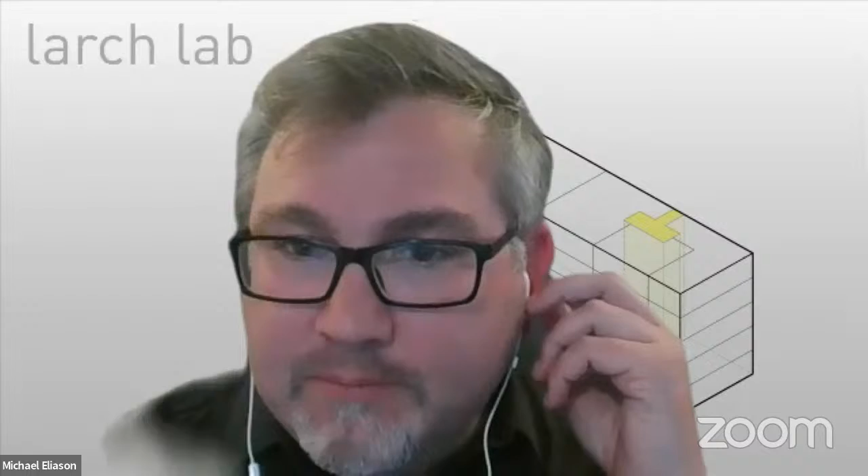But go ahead, Michael. Yeah, I was going to say with our bill here in Washington State, I work directly with the senator's office, presenting the idea, talking about Seattle's code, connecting the city's building department with the senator and his staff. They went out and talked to some of the lobbyists for the cities. They talked to the state fire marshal. So there was a dialogue going on. The state fire marshal didn't squash it immediately either.

I think that's the approach I've taken in a lot of the conversations: this is already allowed in Seattle. If you're a major city, you have adequate fire flow, you have a fire department that can get to where they need to be in the city in adequate time. The restrictions should generally be the same, right?

This is a huge issue that we could talk about, building codes even within the same state not aligning. What we allow here in Seattle, we can't do in the city directly to the north. The variability on the building code side affects so many issues. It's one of the reasons prefabrication is not taking off to the scale that it should. But having those conversations has seemed somewhat fruitful.

On the legislative side, legislators are always interested in talking about this. And the fire marshal and the fire department here in Seattle have been open to talking to people and basically facilitating how it ended up here and how they approach it. For me personally, I would love to see if we could go 7-8 stories. I think it aligns really well with mass timber and more of our housing goals.

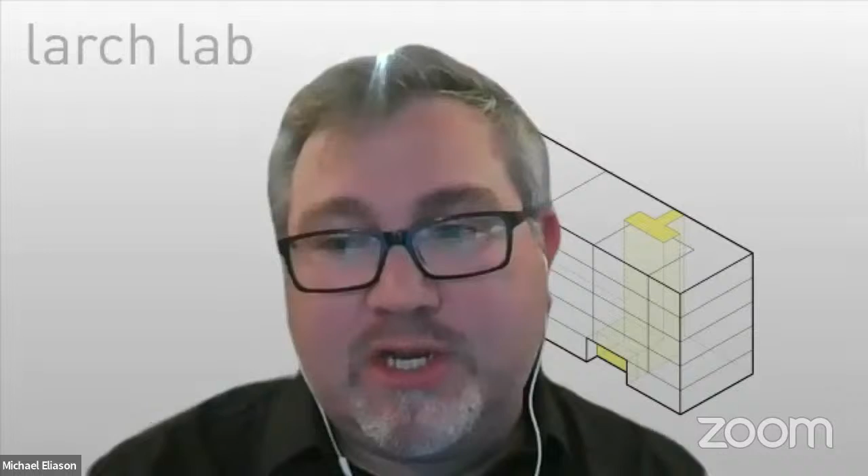And I think one of the other terms was social housing, which I know people here equate to maybe Section 8 or something along those lines, where it's more government subsidized housing. Correct? Yeah, so social housing, I find it a little bit more all-encompassing. You could have non-profit social housing providers. You could have market rate social housing providers, although they're pretty rare. There are government institutions that provide social housing. It's kind of a catch-all for non-market housing, and co-housing in Austria and Vienna is a form of social housing as well.

So it varies a lot by country, but it's really about these well-run, well-planned, government-assisted housing. And in so many other countries, not necessarily profit-based housing, which is what we get in the US. Yeah, exactly. And the quality, like in Vienna, the quality of their social housing far exceeds all market rate housing in the US. It's just unbelievable what they're able to do, and at the costs that they can do it.

We had another question I didn't see. There's a question about potential for cost savings. Is the cost savings coming from the reduced overall floor plate or just overall efficiency? Yeah, in the analysis, and it was a really quick back-of-the-napkin analysis that we did, the significant construction cost savings more than covered the incremental number of elevators. You're still getting 90 to 95% of the number of residents in that building, but you're saving a ton of floor space, a ton of exterior envelope. You're not building as many kitchens. You're not building as many bathrooms.

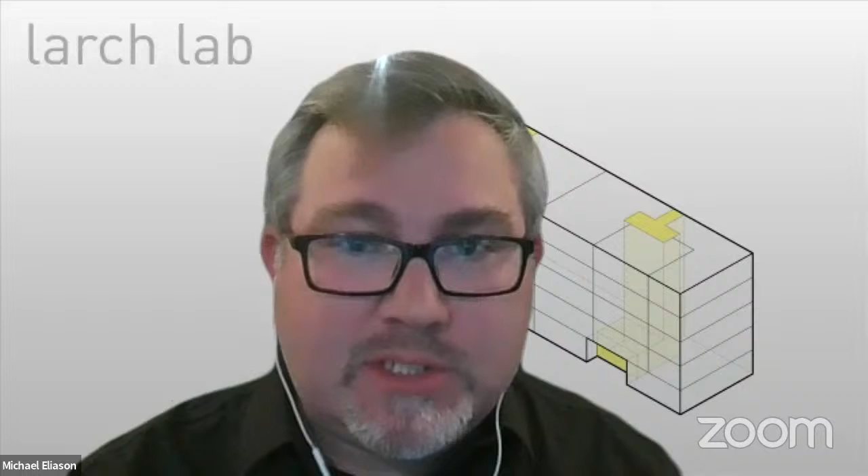Another interesting thing that I learned about recently is that the way that we pipe our plumbing in a point access block is also significantly different. So you can run pipe in pipe, and you reduce the overall amount of plumbing, fixtures and piping used by like 50%. So it's almost a 50% reduction in that as well. So there are all of these knock-on effects to how we design our buildings that we haven't even begun to unravel, because we haven't really started to look at this other than at the superficial level. Gotcha.

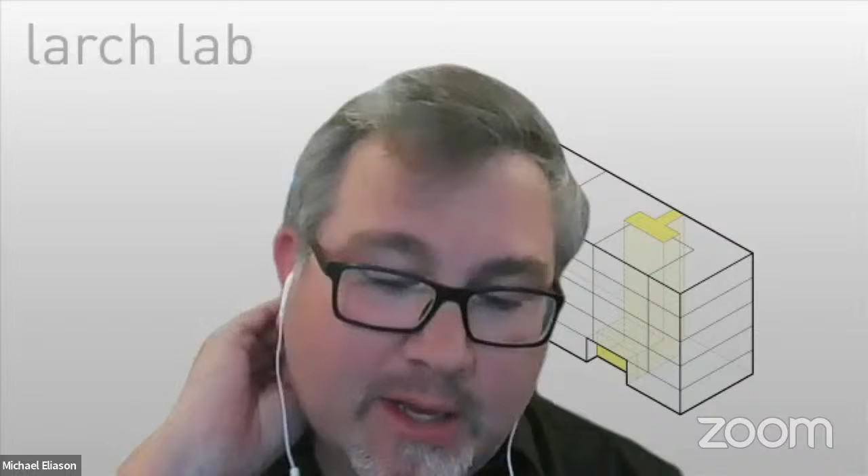Ed, I don't know if you can address this. There's a code question asking about why the 6-story height limit, I guess, from Seattle, right? I'm not too sure about that. Michael, do you know? Do you want to address that? Do you think it's like a fire ladder type thing? Yeah, New York's is the same. It's the 6 stories, and I think that's the apparatus height limit, the limit that it can go. Okay, and then someone was asking, how did it start in Seattle?

Like, who brought this, I guess, to Seattle? Was there a specific architect or developer that initiated the change, or maybe it was a variance, when it first started? So I'm not sure. I know when it happened.

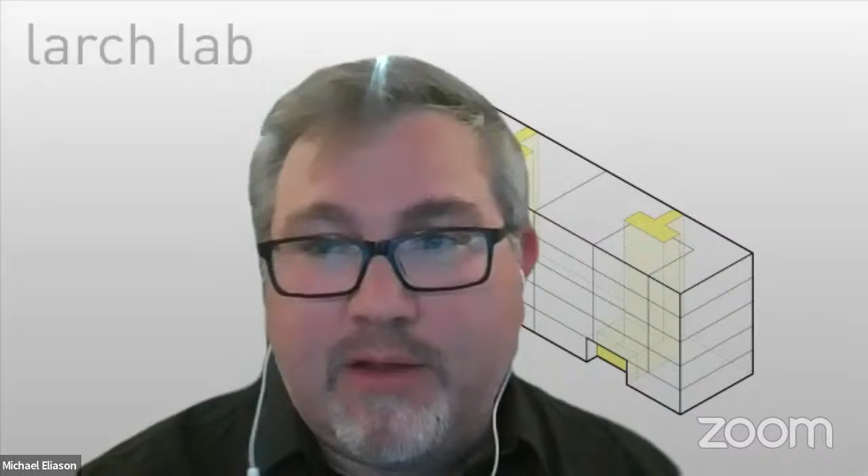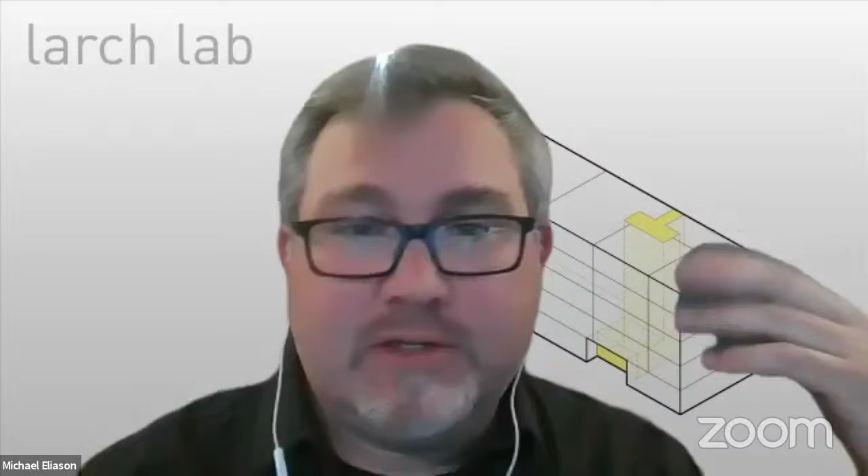I don't know why it happened, but the city council here has the power to modify the state building code. And in 1977, they modified it to go from 3 stories of single-stair building to no height limit, which completely blows my mind. It's like, oh my gosh, we're Switzerland. Let's do this. But still requiring sprinklers and fire-rated assemblies and things of that nature. Gotcha. I don't know that any projects actually did that, and I haven't had the opportunity to explore that. It would be interesting to find out, though.

I think that's all the questions. I had a question about what I think you all covered, kind of like aesthetics. But Ed, you want to start maybe with any closing comments? You get way prettier, more livable buildings with single stair layouts. They kind of make sense. We should really, really consider implementing this code.

Michael, any closing comments? Yeah, so the Surgeon General came out 2 weeks ago with a report on the epidemic of the loneliness and isolation crises in the US. And I look at our built environment, and it's not just cars and sprawl, but how we build our cities and even plan our buildings. Like all of our status quo biases lead to these places where we're kind of self-isolating. We're not going out and meeting people in places that are quiet where we can actually hear them. I feel like our entire built environment needs to radically change to start to address some of those issues.

And point access blocks are not the silver bullet to this, but both of the times that I lived in Germany, I lived in a point access block, and my neighbors were right there. I could run across the street or the corridor to them at any point. Most recently in Bavaria, we lived in a fourplex of maisonette units, so 2-story units. And you just go up half a flight of stairs and you're interacting with all of your other neighbors,